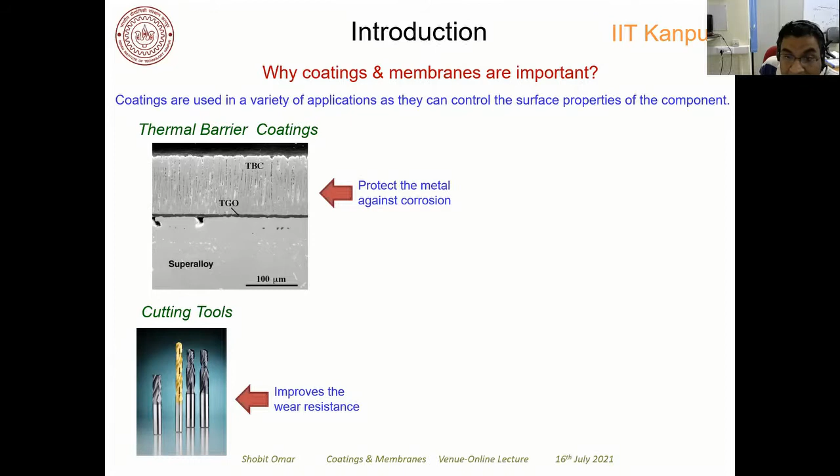Coatings are widely used in semiconductor industries, and for example, people use them for depositing silicon as well as for depositing insulating material like silicon nitride. Okay, I guess everybody is aware that insulating materials are as important as the electrically conducting materials, because they form the barrier between the two electrically conducting materials, right? So silicon nitride coatings are very important in these circuits.

And of course, solar panels are made of coatings of amorphous silicon, or nowadays people use these perovskites, organic perovskites. So these types of solar panels are also made of coatings, right? Thin film coatings. So people use sophisticated techniques to make these solar panels.

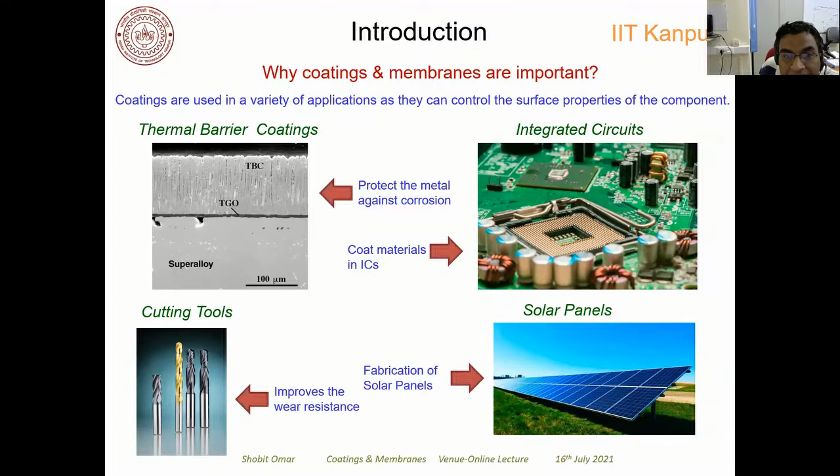These coatings are also used to improve the hydrophobic nature, right? So some coatings are done on the material so that the hydrophobicity increases, and sometimes you want to decrease the hydrophobicity. You want it to be hydrophilic. So in that case also the coatings are used.

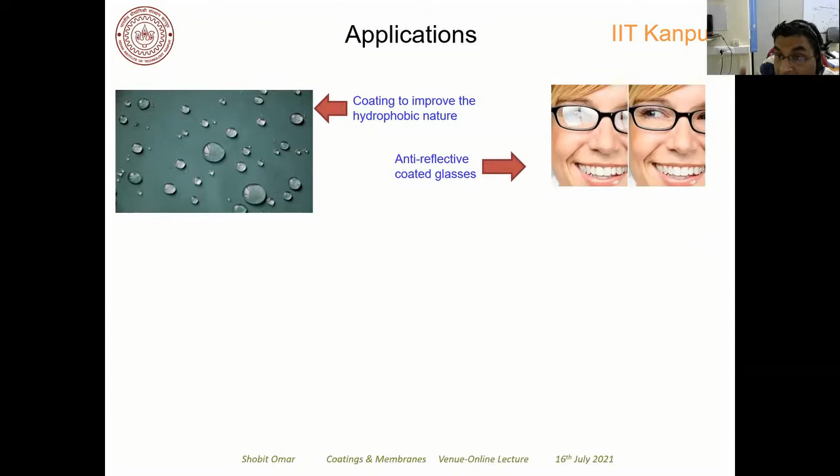These anti-reflective coatings are used on glasses, right? To make the vision more clear. And sometimes people use antibacterial coatings to protect the surface. Okay, these coatings are very important nowadays with COVID-19 type viruses out there. So people try to coat the sample or component with antibacterial coating.

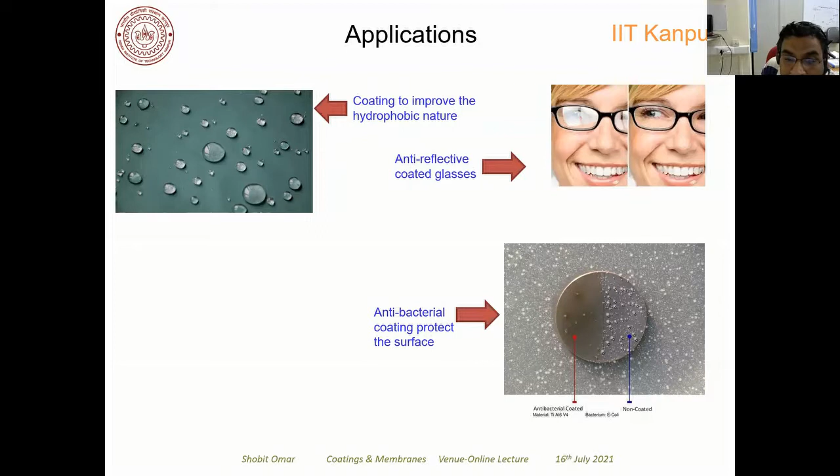And they are also used in other devices such as batteries, and I will talk about it. But you can see that the current collectors here are coated by the electrodes, right? So electrode coatings are there, and there is an interlayer which separates these two electronically conducting electrodes, right? So the separator, which is an interlayer that does not conduct any electrons, separates both these electrodes. So coatings and membranes are very important in this application as well. And more about this when I talk about the case studies.

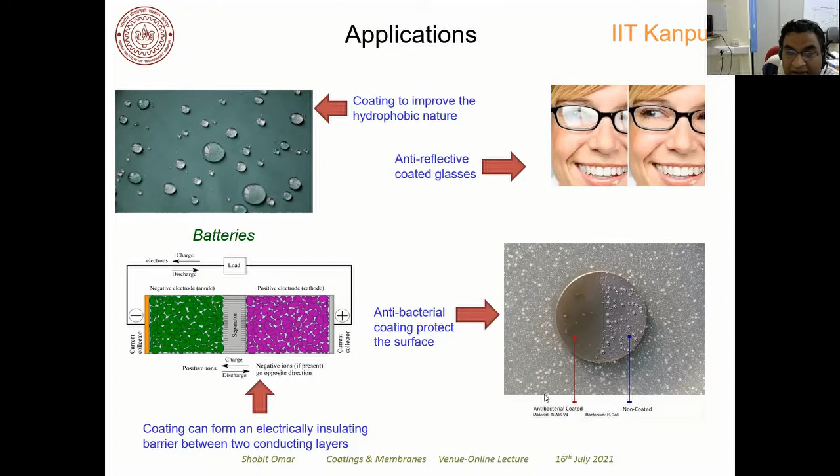So let us talk about the different deposition techniques people use to deposit the coatings. Now, before going into that, I want to say that there are a lot of things which are very important when you select what type of deposition technique you have to use to coat the samples or the component. First and foremost is the cost. What is the cost requirement, and what is the thickness that you want to make of that coating? And the other thing is whether your component material can withstand the condition in which the coating is made. What is the sample size, right? All these things are very important while selecting what type of technique to use for a particular application.

So let us talk about the deposition techniques. Well, there are different types of deposition techniques people have used, and here I have listed a few of them. The first one is if you deposit a vapor on a substrate, and those types of techniques are physical vapor deposition and chemical vapor deposition. I will talk about them later on. But here the vapor is getting deposited on the surface of the substrate. Then what you have is a wafer, which is a substrate placed inside the chamber, and the constituents of the film are delivered in the gas phase, right? As I said, it's a vapor deposition, and they form a thin film on the substrate.

Then you have liquid phase deposition techniques, where liquid is getting deposited on the substrate. And we have a few of them, like spin coating, spray coating, blade coating, dip coating, and of course tape casting, which is a kind of blade coating.

So we will talk about it, but more or less the principle is that you form a uniform slurry or solvent, and you coat it on the surface of the substrate to form a thick film. Normally, the vapor deposition techniques are used to make thin films, while the liquid phase deposition techniques are used to make a thick film. Okay.

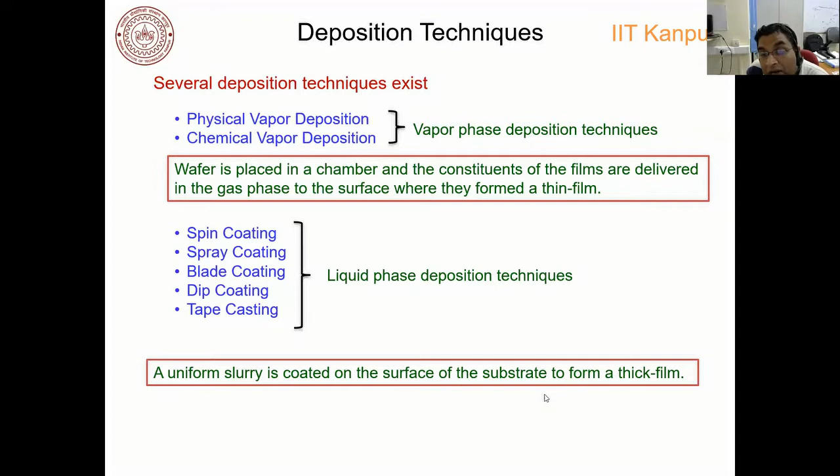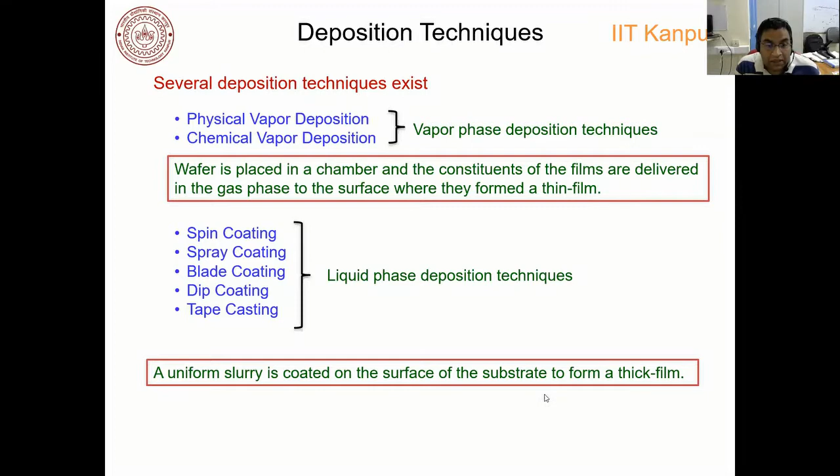Of course, there are vapor deposition techniques where you can make thick film as well, but then the quality of the film as well as how much time and money is involved to make that film is also a part of the consideration that you have to make while selecting the vapor deposition technique to make a thick film. So let us talk about the first vapor deposition techniques.

Okay, so what are the requirements to make a thin film deposition? Well, the composition of the film should be the same as what we have desired, right? Because this is a vapor deposition, the composition of the thin film should be very much what we have desired. It should not be different, okay? And there should be low contamination. I will talk about that. We normally use a target material to coat the substrate, so the contamination may come from there. So we have to make sure that there is low contamination inside the thin film that is deposited on the substrate.

For semiconductor industries, electrical properties are very much important. So if you are putting a dielectric material, then you should not have any electrical conductivity inside the thin film. And if you are putting electrically conducting material, then the electrical conductivity of the thin film should be preserved. So that's one of the important aspects that you have to take care of when selecting a certain type of vapor deposition technique, right?

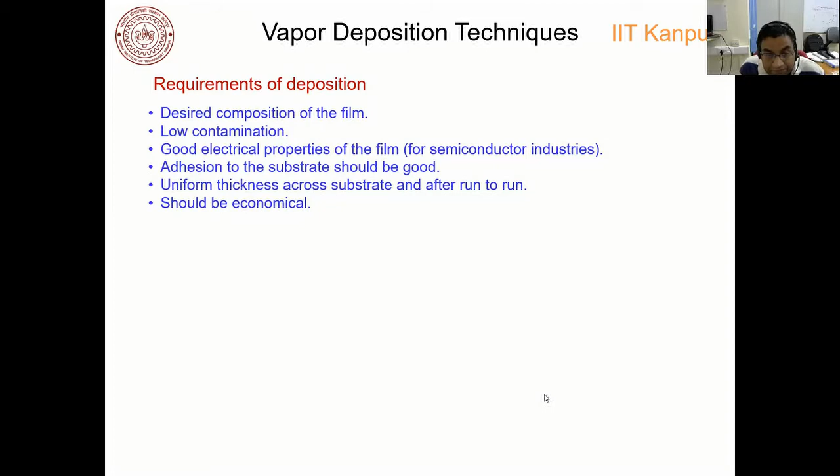And when you talk about the differences between chemical vapor deposition and physical vapor deposition, as I said, vapor deposition is of two types, chemical vapor deposition and physical vapor deposition. You will see that in CVD, the film would occur at high temperature, leading to a formation of corrosive gaseous products, which may leave impurities in the thin film that you are depositing, right? So you have to make sure that these products that are formed are pumped out of the chamber efficiently. Otherwise, they will form contamination.

In a physical vapor deposition, the film deposition takes place at relatively low temperature, but there are some variants as well where you require high temperature. But normally, this type of technique occurs at low temperature, and you do not form any type of corrosive products. Okay, so this is one of the advantages of PVD compared to chemical vapor deposition. In PVD, you do not form any type of products, and in CVD, you form gaseous products you have to flush out from the chamber.

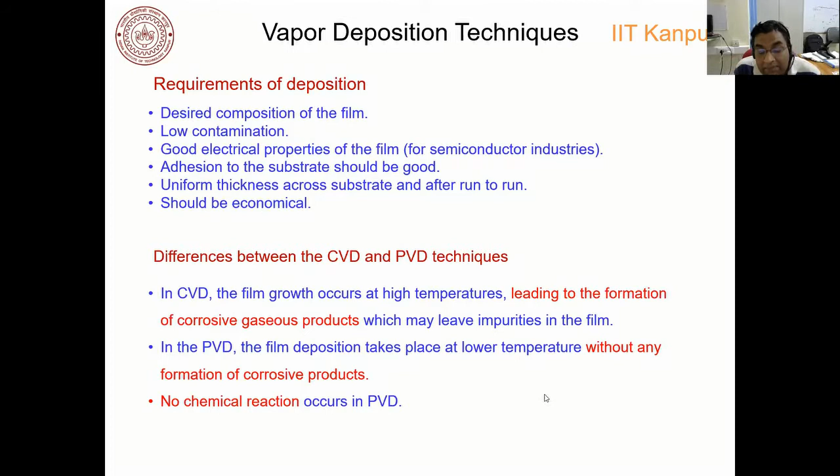Now, this is one of the advantages, but one of the distinct features of CVD is it has some chemical reaction involved, right? And in PVD, there is no chemical reaction involved. So this is a difference between a CVD and PVD process. So let's talk about the PVD first, okay? PVD is the acronym of physical vapor deposition.

It's a vaporization coating technique that uses physical means to transform the solid material to vapors, which will coat the substrate. So I just want to correct here. It is not just a solid material. It can be a liquid as well. But the important thing is that it is using a physical means to transform that solid or liquid material to vapors, and those vapors are going to get deposited on the substrate.

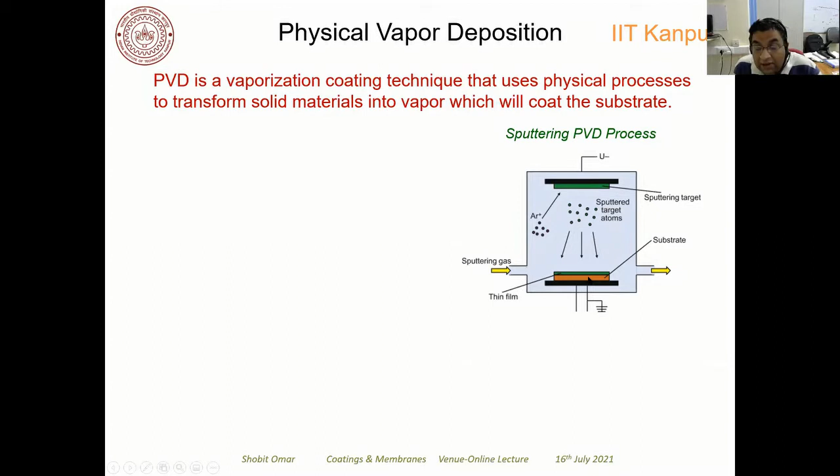This figure shows the sputtering PVD process. You can see that on the top you have a target, and the sputtering gas is fed into this chamber, which has a high vacuum, and this sputtering gas sputters the target, and the atoms are ejected out from this target, and these atoms in the gaseous or vapor form get deposited on the substrate. Okay, so this is normally the principle of physical vapor deposition.

So here I just showed you the sputtering PVD process, which I will discuss later on also. But an important aspect of PVD is that you can use a solid or liquid source to create thin films, right?

To create vapors. So this solid, here I have shown the solid phase, right? But you can also use liquid phase. Okay, that is also physical vapor deposition. And it uses a physical process such as high temperature, vacuum, or gaseous plasma to force the material to be deposited into vapor form.

So it transforms the solid or liquid into vapors using a physical process, and that physical process can be high temperature, vacuum, or gaseous plasma. So atoms in the gaseous form travel from the source to the substrate under partial vacuum. The vapor undergoes condensation on the substrate to form a thin film, right? And you can see there is no chemical reaction occurring in this process of physical vapor deposition.

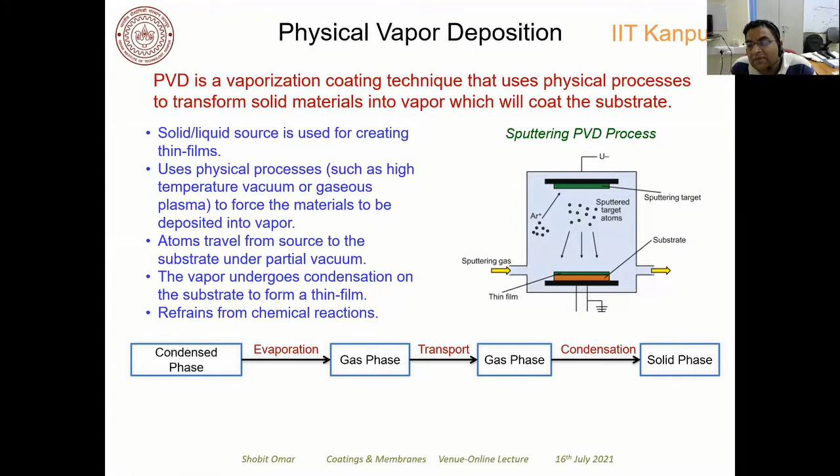So if I summarize, I can say that the condensed phase, which is solid and liquid, is first evaporated to the vapor phase, and then that vapor phase is transported from the target to the substrate, and then it condenses to form a thin film solid phase on the substrate.

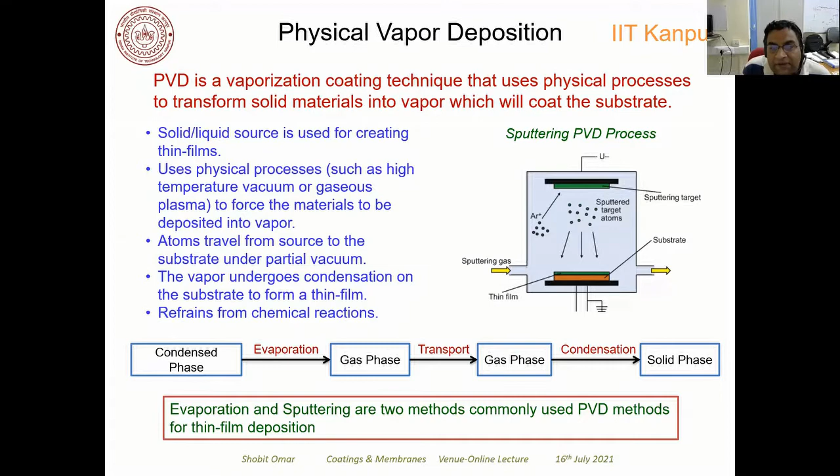Evaporation and sputtering are two commonly used methods in PVD for depositing thin films, right? So I can classify physical vapor deposition into two ways. One is evaporation, the other one is sputtering. So let's talk about evaporation. These are the evaporation system requirements. You require very high vacuum, around 10⁻⁴ to 10⁻⁷ Pascal, for better quality films.

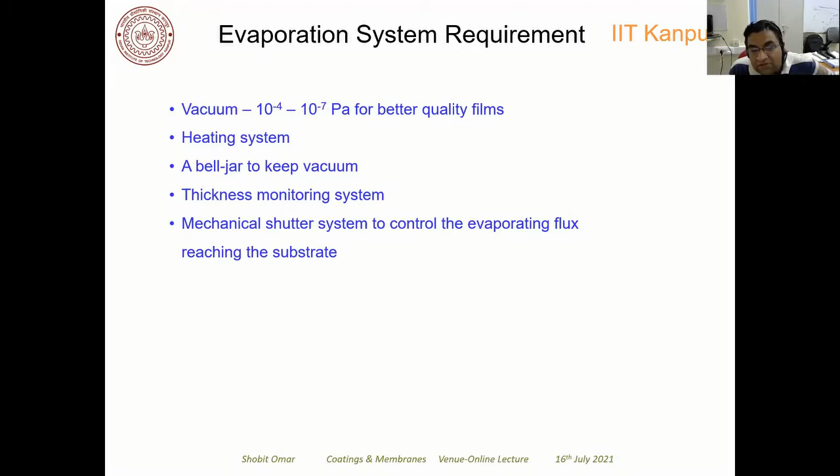You require a heating system. The heating can be thermal heating, or it can be heated by plasma. You require a bell jar to keep the vacuum inside the chamber. You require a thickness monitoring system, as well as a mechanical shutter system to control the evaporating flux reaching the substrate. So you have to control that evaporating flux coming from the target to the substrate, so you require a mechanical shutter system as well.

So let's talk about the thermal evaporation deposition technique. As I said, there are two types of PVD. One is evaporation, the other is sputtering. Here I am talking about evaporation, and in evaporation you have the thermal evaporation deposition technique. As the name suggests, thermal evaporation deposition uses external heating to heat the target material, and that target material is converted into the vapor phase, and that vapor is deposited on the substrate.

The important thing about this vacuum is that if you have high vacuum, then the atoms can go in vapor form directly from the target material to the substrate without getting scattered in between. Also, normally the distance between the target material and substrate is quite far, compared to the electron beam evaporation deposition technique or the sputtering process.

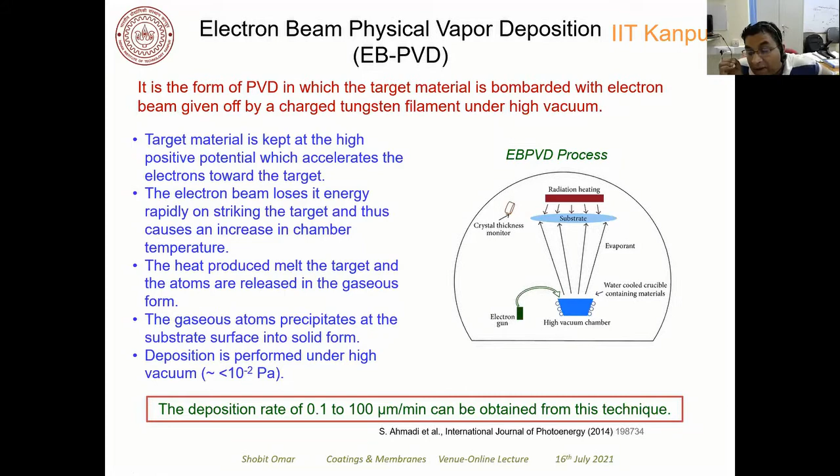The deposition rate is around 0.1 to 100 micron per minute, and that is what we can obtain from this technique. Now, the important advantage of E-beam physical vapor deposition is that you can go to very high temperatures, because you are locally heating your target material, so this technique can allow deposition of refractory metals such as tungsten, tantalum, right? So this is one of the main advantages of using electron beam physical vapor deposition.

The other thing is that since you are locally heating the target, you can use different types of target inside the same vacuum chamber. Okay, so you do not basically break the vacuum, right? You don't have to break the vacuum to change the target every time, right? So you can make multi-layer structures in the same chamber.

Okay, and of course the contamination is not much because you are not heating the crucible, you are heating just the material, and you are locally heating the material. So low degree of contamination from the crucible in the thin film that is deposited on the substrate. Okay, so these are the main advantages of using electron beam PVD technique.

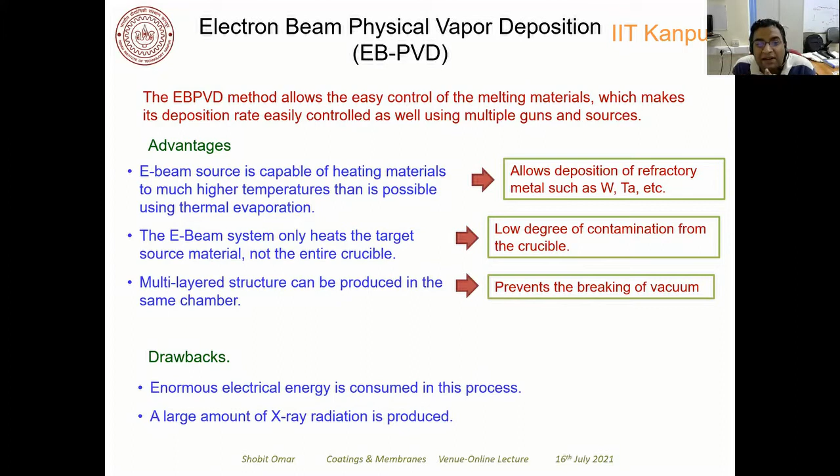What is the disadvantage? Disadvantage is that you are consuming a lot of electrical energy to melt the surface of the target materials, right? And when the electron beam interacts with the solid material, it can also produce X-rays. So X-rays are produced inside the chamber. So these are a few drawbacks of electron beam physical vapor deposition.

Any questions till now? If you have any questions, please ask me right now. Okay.

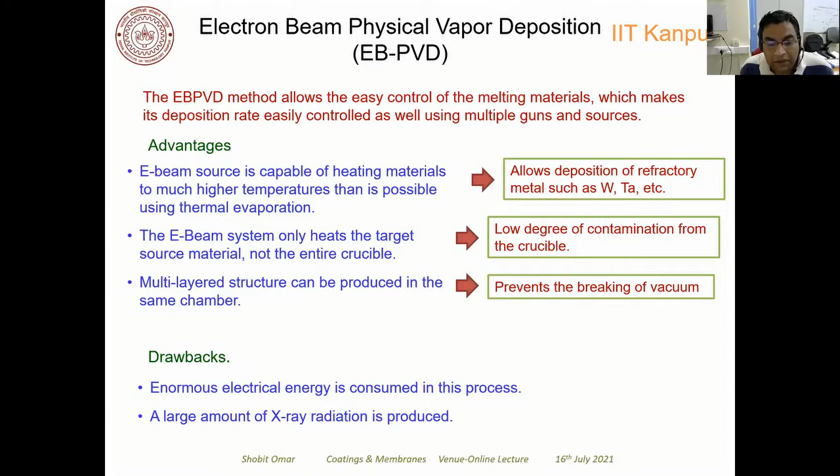So let's talk about the modeling of the evaporation vapor pressure, right? So first of all, I talk about this P star, which is the partial pressure of a gas in equilibrium with a condensed phase at a given temperature. Okay. So we know that for any type of material, we have a vapor pressure. And that vapor pressure is basically the pressure that is applied by the vapor phase on the condensed phase of that material at equilibrium, right? So at that point, there is no transfer of material from the condensed phase to the vapor phase and vice versa, right? So that pressure is called the vapor pressure, which is given by P star.

Okay. Now this P star, we say that the higher the vapor pressure of the material is, the more volatile it is. Okay. The more the vapor pressure, the more tendency this material has to get evaporated and to form the vapor phase, right? So now P star is only a function of temperature, and I will give you the relationship between P star and T. It is governed by the Clausius-Clapeyron relationship, and it is given by this.

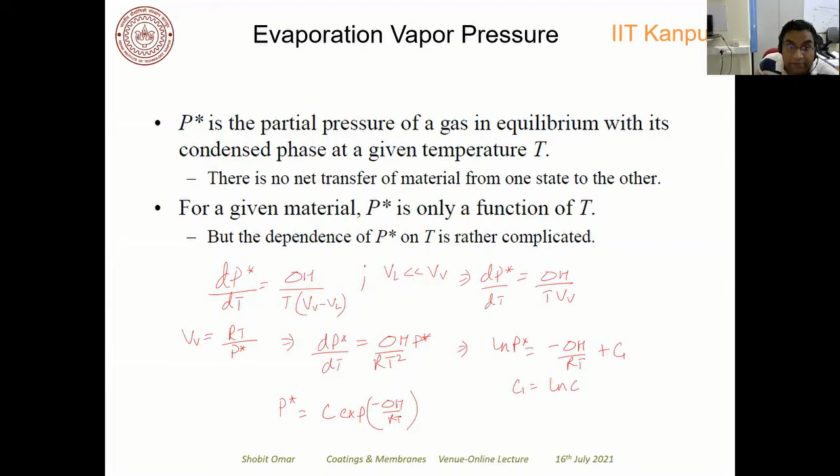Okay. So again, I repeat here that the higher the vapor pressure, the more volatile the material. So the evaporation is more when you have higher vapor pressure. So ΔH is constant in this equation? Yes, it's a latent heat. Okay, sir. Okay, so what I have shown you here in the previous slide is P*.

And let's say there is a hydrostatic pressure which is applied on the condensed phase, right? On the condensed phase from the evaporant. And that pressure is given by P. Okay. So, Heinrich Hertz found experimentally that the evaporation rate is proportional to P* minus P.

Okay, so if you have a solid material and evaporation is occurring, the evaporation rate is proportional to this P* minus P, and that is also consistent with the kinetic theory, in which the impingement rates are proportional to pressure. Right? Impingement is how much collision is occurring on the surface. Right? So that flux is proportional to the pressure.

And the important thing is that Hertz also found that the evaporation rate could not be increased by supplying more heat. It cannot be increased unless you are changing the temperature and changing the P* value. Okay, P*. As I said, from the Clausius-Clapeyron relationship, P* is only dependent on temperature. Even if you are giving a high amount of heat and it's not changing the temperature, then evaporation will not change.

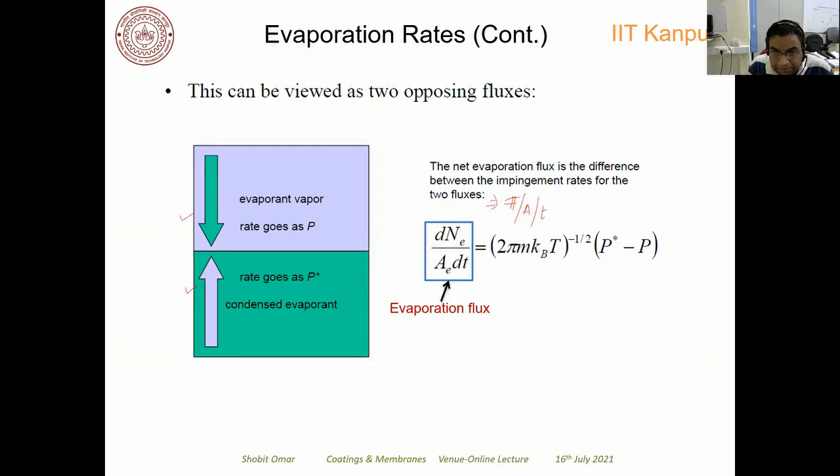Now, Hertz measured the evaporation rate, and he found that in mercury vapors, the value that he was getting from the evaporation is basically 1/10 of what you obtain from this relationship. Okay, so something is amiss. There is something which he is not considering, right?

So Knudsen postulated that the evaporated vapor molecules impinging on the condensed phase surface may be getting reflected back. Okay, so whatever atoms are going from the condensed phase to the vapor phase, they may be getting reflected back to the vapor phase, and maybe we are overestimating the evaporation rate from this expression, right?

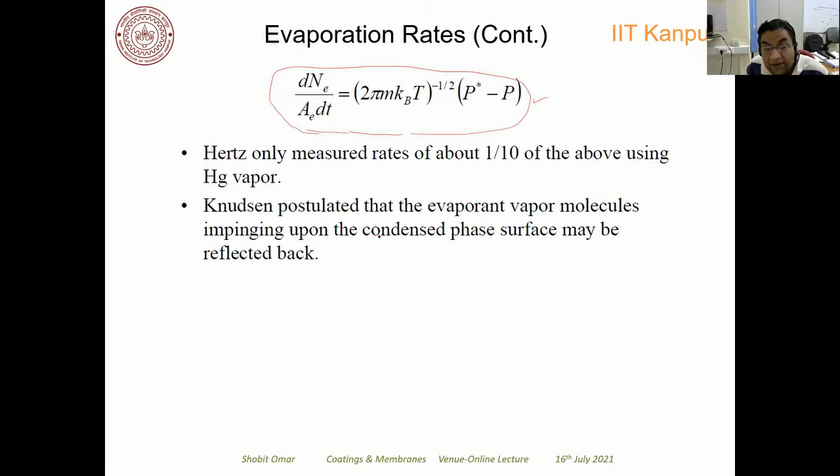So what he came up with is this relationship, which is called the Hertz-Knudsen relationship, and he used a constant coefficient called the sticking coefficient, which takes care of this return flux which is getting reflected from the condensed phase surface.

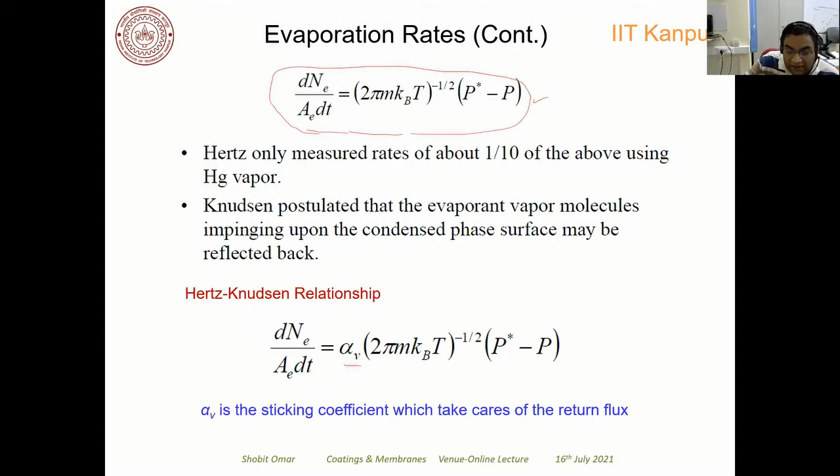Now, Knudsen also came up with a type of chamber geometry where the sticking coefficient is almost equal to 1. That means there is no return flux coming out. So we will talk about it here. I just want to write the evaporation flux here, dNE/dt, and it is given by equal to (2 pi m kB T) to the power minus half, where kB is the Boltzmann constant, T is the temperature, and m is the molecular weight, or atomic weight, you can say. Then you have P star, because P is going to be 0 when you have a

vacuum. And in Knudsen's cell, as I was saying, Knudsen had designed a cell where the sticking coefficient is almost equal to 1. So in that particular case, the sticking coefficient is going to be equal to 1. So what you have is dNE/(AE dt) equal to (2 pi m kB T) to the minus half, times P star. So this is what you will have.

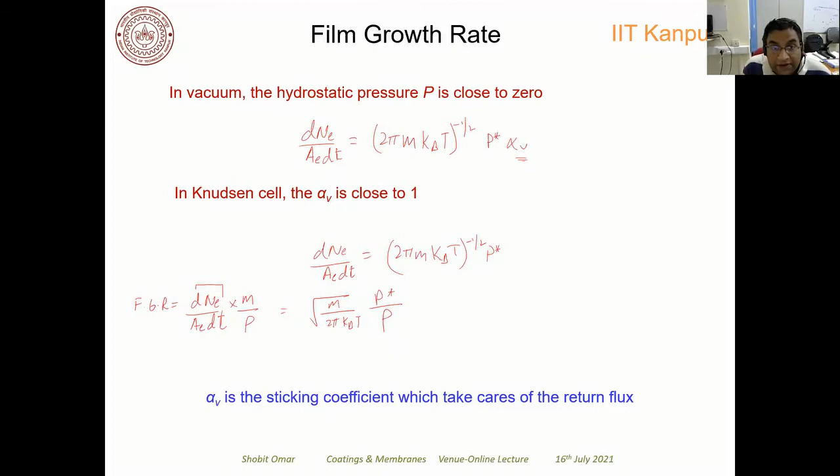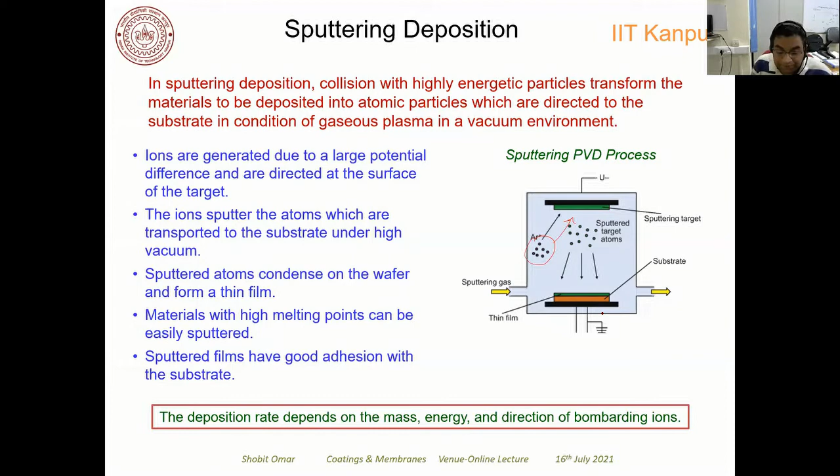Once the electrons are in the cylindrical path, they collide more with the argon atoms, and this results in more ionization of argon to form highly energetic argon ions. These argon ions are positive in nature. They strike the target material, which is negative, basically cathodic. So these argon ions strike the cathodic material, and the atoms get ejected and then reach the substrate.

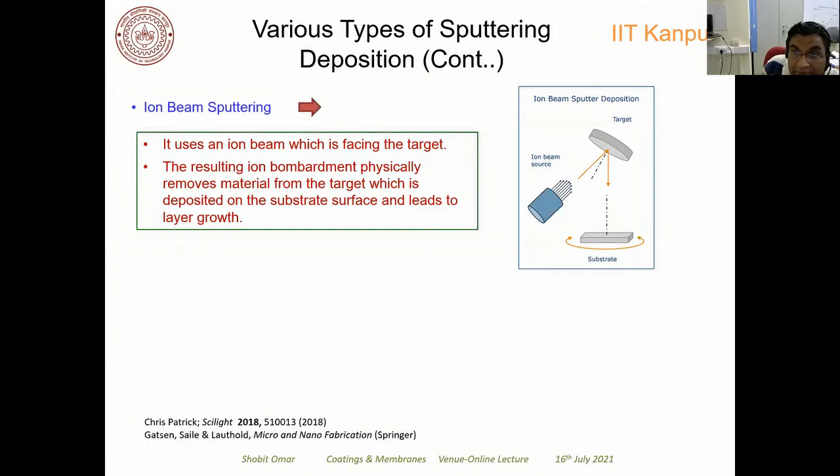Now, we also use the ion beam sputtering technique. In the previous case, we used the plasma, right? This sputtering technique uses an ion beam. Collimated ion beams are directed to the target surface at a particular angle, and then you have a substrate which is rotating, and the sputtered atoms in the vapor form get deposited on the substrate. So this is how the deposition occurs. In this particular case, we are using an ion beam as a physical process to deposit a thin film on the substrate.

Then there is also another variant which is quite extensively used to make a thin film of a dielectric material, the PLD technique, where you ablate the target material with highly energetic photons. They can have a high energy of 10 to the power of 8 watts per centimeter square. Once this laser beam strikes the surface of the target, the material absorbs the energy, and a plume of plasma is formed, and this plume condenses on the substrate, which is present at a certain angle. Also this substrate is heated, and that controls the nucleation rate of the thin film deposited on the substrate.

We also sometimes use oxygen and nitrogen, because when you use such a high temperature, the oxide may lose some oxygen, and that may create some defects inside the material. In order to keep the stoichiometry the same, we use oxygen as a background gas, and sometimes we also use nitrogen. But in all these techniques, there is no chemical reaction involved. Only physical means are used to sputter the target into the vapor phase, and that vapor phase is deposited on the substrate to form a thin film.

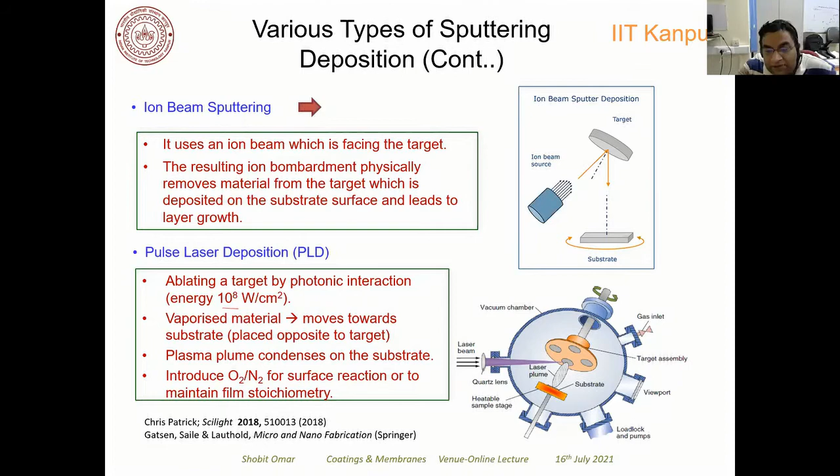Now let's talk about chemical vapor deposition, which is also a very important technique, quite extensively used especially in the semiconductor industries. As I said, it is used to deposit silicon, it is used to deposit silicon nitride, it is used for etching purposes, and it is also used for functionalization of the surface of the component. Now let me describe it here. What is basically the CVD process?

The chemical reaction is happening, and they form a thin film. Of course, if you have a chemical reaction, let's say you have a gaseous phase of A and B coming, they react to form C and D, right? So C forms a thin film, and you also have D, another gaseous product which has to go out from this chamber. So we have to pump this D phase out of the whole chamber. So this is the chemical vapor deposition technique, right?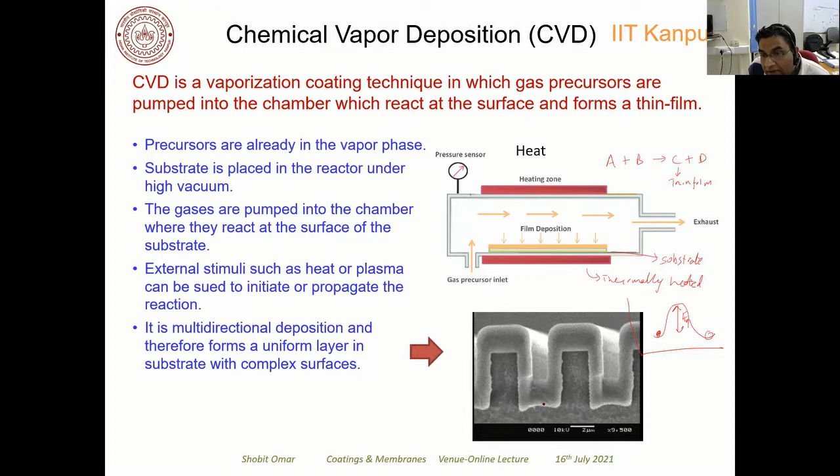Okay, so this is what I was talking about. Even if you have some type of grooves here, you will still have a uniform covering of the coating using the CVD process. Okay.

Of course, the gaseous products that are formed in this chamber have to be pumped out. Otherwise, that will lead to deposition, and that will contaminate the thin film that is formed on the substrate. So you have to have some means to take out this gaseous product from the chamber.

What are the different types of CVD processes which exist? There are many, but they share the same principle that I discussed in the previous slide, and I'd just like to state a few of them. One classification of CVD processes is based on the pressure inside the chamber. Some reactions occur at atmospheric pressure, so that is atmospheric pressure chemical vapor deposition. Some require low pressure, then you have low pressure chemical vapor deposition, and some require ultra high vacuum, then you have ultra high vacuum CVD.

Okay, and we also characterize CVD processes based on the stimuli that you apply. For example, here we use plasma enhanced chemical vapor deposition. So instead of using thermal heat, we use plasma to make the reaction occur. Now when you use plasma, you have to have some source of plasma inside the chamber. So that is plasma enhanced CVD. We have a source of plasma, and the substrate where the reaction occurs because of the heat provided by this plasma.

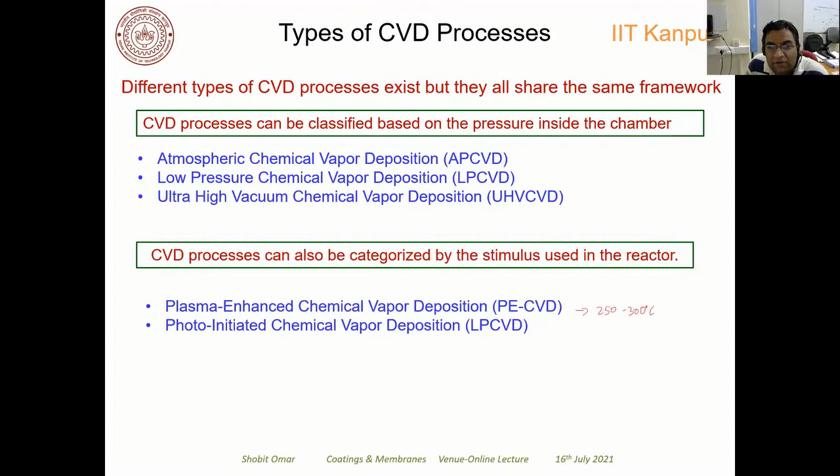Some CVD processes have a stimulus of photons, right? So the photons can initiate the process, and those types of CVD are called photo-initiated CVD. Sorry, there is a typo here. It's a photo-initiated CVD process. Okay.

Then we also have atomic layer deposition technique, which is a type of CVD process in which gaseous vapor is introduced one at a time in sequence. Okay, so you will get one layer of one phase, then you have another layer of another phase. So you can make a multi-layer structure using atomic layer deposition. Okay.

So these are the two important processes which I have talked about, which are based on the vacuum technology for the deposition of thick to thin film, and normally these processes are used to make a thin film, and thin film are basically the nanometer range.

If you have any question till now, you can ask me right now. Shall I proceed? If you have any question, you can ask me. Okay, so I will proceed. So, Mr. Omar, if you want a small break for a tea or something like that, please take it. It's not our idea to make you... No, that's fine.

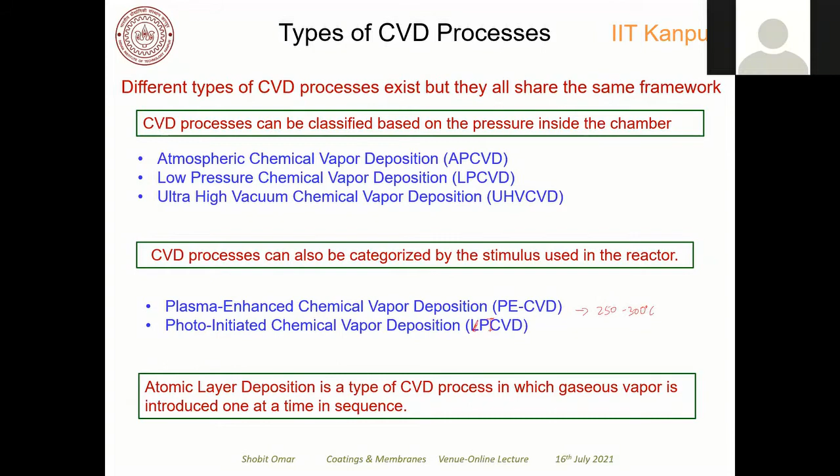I will continue. Okay, so another type of technique which is very important is thermal spraying technique. This technique is not a vapor deposition technique. In this technique you basically melt the powder that you have, and that melting will be done either through plasma, or by supplying thermal heat through combustion flame. Okay, and this liquid powder or melt is then deposited on the substrate, right? And you will have a uniform microstructure.

And I will talk about this plasma spraying when we talk about the thermal barrier coatings, right? So there are various variants of thermal spraying coating, and one of them is electric discharge spraying, and the other is oxy-fuel coating spraying. You cannot make very thin coatings using thermal spraying technique. You can go from 20 micron to several millimeter. Okay, and the melt that is deposited on this substrate is basically called splat, and they have a certain microstructure, which I will talk about later on.

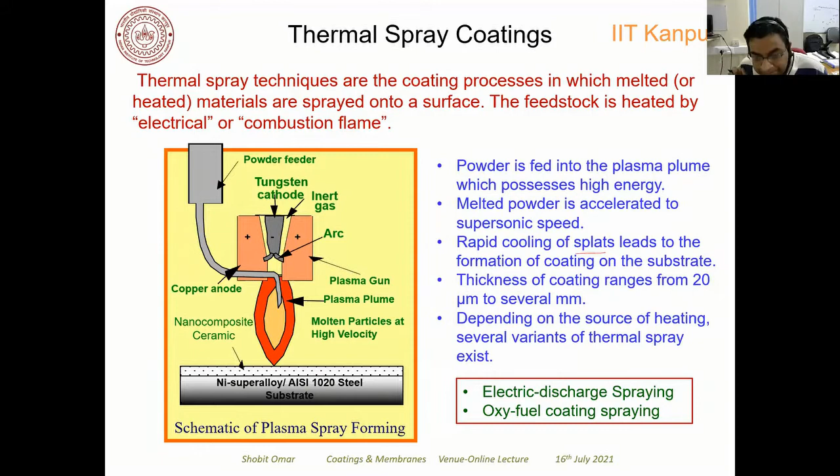Now let us talk about liquid phase deposition, which is also very important when we try to coat ceramic or any type of polymer, right? And this type of technique is also extensively used in semiconductor industries. It is also used in consumer electronic markets, where you have cell phones which are made, and you want to have a polymer deposition on a metal substrate, then you use these type of coatings where the liquid phase is deposited on the hard ceramic substrate or a metal substrate. So basically the material is deposited in the liquid form.

Okay, so high molecular weight polymer is dissolved in organic solvent, and you will get a uniform adherent defect-free polymeric film using these techniques. And you will evaporate the solvent, and the solid film that will remain will form a uniform coating on the substrate. So there are various types of techniques present, and a few of them are listed here. One is spin coating, spray coating, blade coating, tape casting, and dip coating techniques.

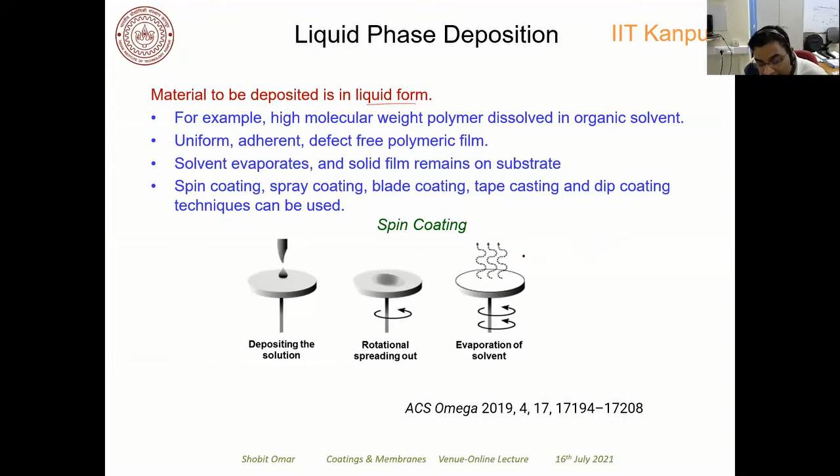Okay, so let's just talk about the spin coating technique, and you can see that you require a vacuum chuck which can hold your substrate here, and you first clean the substrate so that there should not be any contaminant. You remove all the particles from the surface of the substrate, and then you drop the liquid phase on the surface of the substrate, and then you spin this vacuum chuck. Because of the centrifugal force, this liquid will get deposited uniformly on the surface of the substrate, and the thinning of liquid film will occur.

Once it is done, if you dry it, the solidification will occur from the center, and then it slowly moves in a radial direction, and finally you will get a solid film once you dry it. So this is how this process occurs, and the major issue with this is that you can only do it on a flat surface, and the maximum thickness that you will get is around 200 microns. So if you have surfaces where you have some type of side walls, you cannot use this technique. That's a drawback of spin coating techniques.

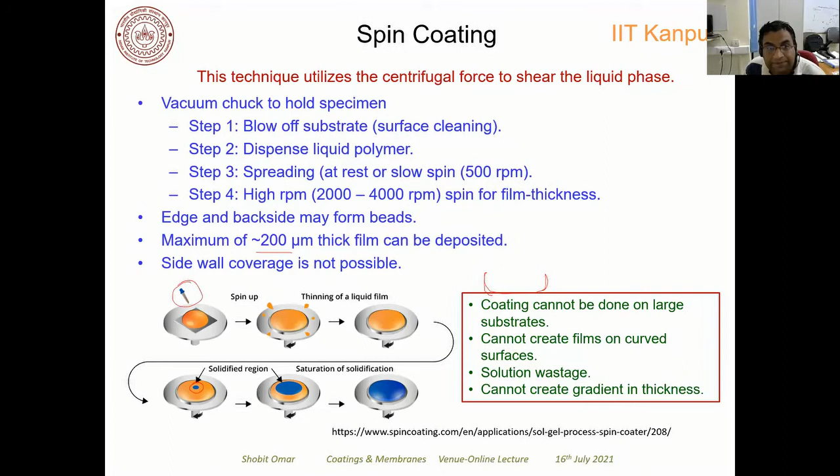So film thickness depends upon the rotational velocity, because rotational velocity will dictate what is the centrifugal force that you will apply. So higher the velocity, smaller the thickness, right? So this is the relationship that we have, where K and alpha are the two constants, right?

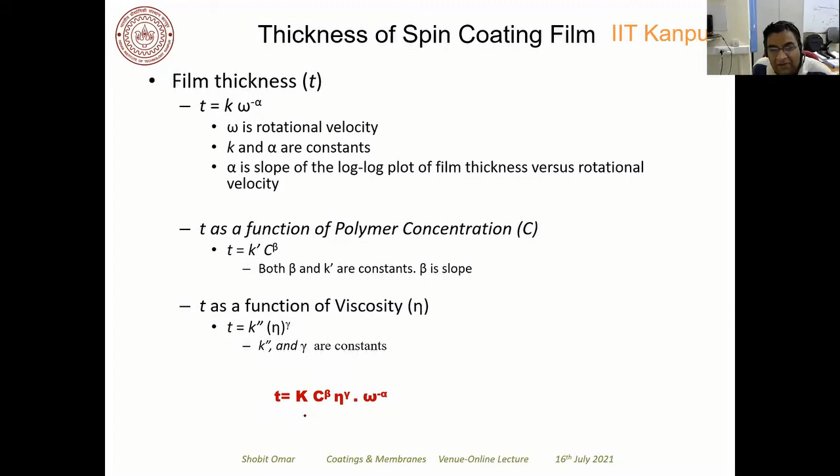And then thickness also depends upon the polymer concentration. If you have a higher concentration, then you will see that the polymer is more viscous. The thickness is directly dependent on the polymer concentration. Also, thickness will depend upon the viscosity, and you can see eta is the dynamic viscosity here, and there are a few constants. So if you sum these three relationships, then you will get the expression for the thickness of the coating. Here, K, beta, gamma, and alpha are four constants.

Yes, I know. Dear participants, I think we have lost the speaker. Is he still there? Shobit Omar. Dr. Shobit, oh, yes, please. Yes, we have you back now. We lost you about maybe a minute ago. Your screen is not there. My screen is not there? Okay, let me share this again. Is it there now? Yes, we can see that. The same slide you were talking about.

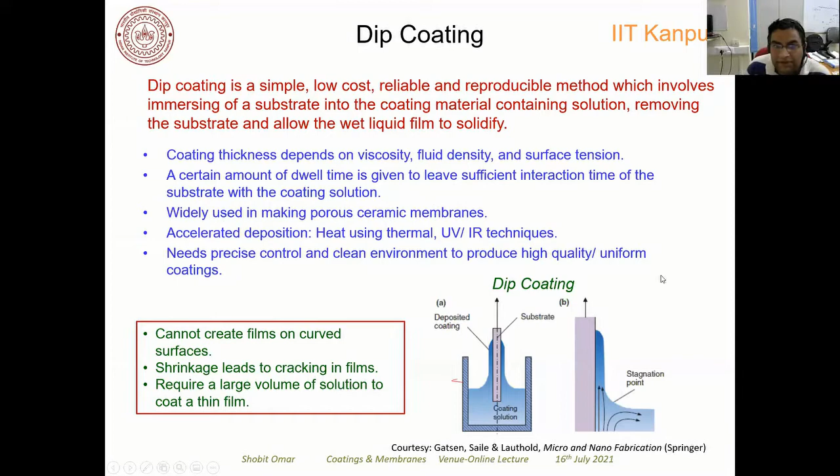Okay. So let's go to another liquid phase coating technique. It's blade coating, and in this technique you have a liquid phase and you run the blade over the substrate. There is a gap between the blade and the substrate, and through this gap, the thickness of the liquid coating is decided.

If you want a thicker coating, then you keep this gap higher. So the small gap between the blade and substrate determines how much solution can get through.

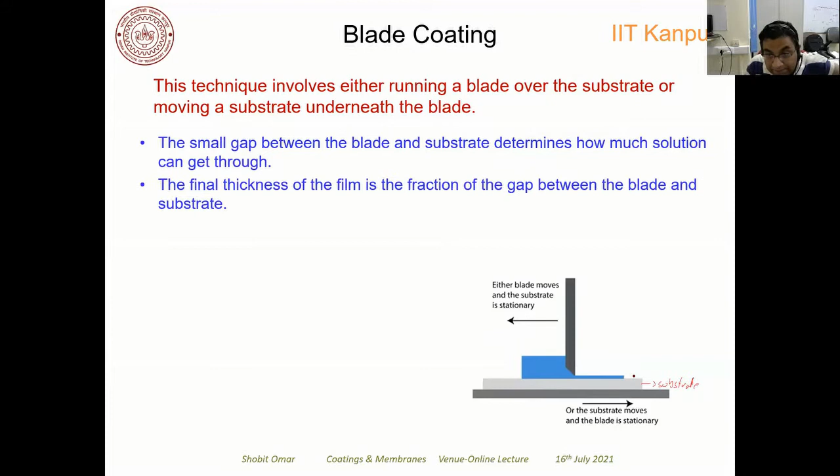Okay, so this blade is run through the substrate, and the final thickness is basically the fraction of the gap between the blade and substrate. And the final thickness also depends on the viscoelastic property of the solution and the speed of the blade while it is running over the substrate. Okay.

This process is scalable, but it cannot be used for a curved surface, and it is an inexpensive process. You can set it up in your laboratory, and you can make a uniform thin film on the substrate. Okay, but you cannot make it on a complex component with a complex structure. Also, you cannot make very thin films from this process. You cannot make a film with a thickness of less than 10 micron using this process.

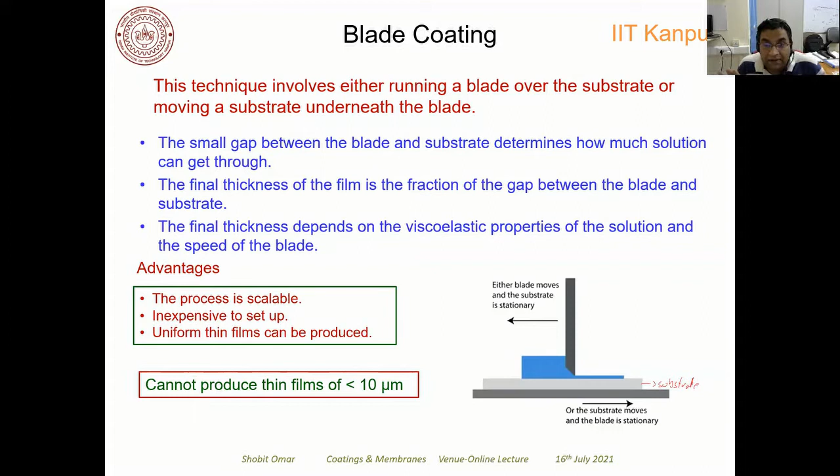Now we have the electrochemical deposition technique, and here I have shown you certain silver coatings on plates which are placed inside this liquid electrolyte. The deposition occurs through electrochemical means, and that process is called electrolysis. According to Faraday's law, given in 1833, the amount of chemical change produced by an electric current depends on the quantity of electricity that is passed.

So you have an electrochemical cell with a cathode and an anode. The deposition normally occurs at the cathode, where ions from the anode pass through the electrolyte, get reduced, and get deposited on the cathode to form a thin film. The amount of energy that you give dictates the amount of electrochemical reaction that will occur.

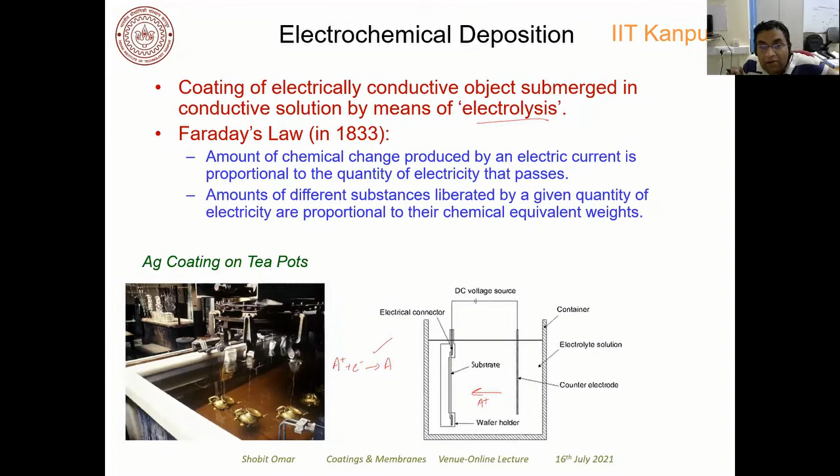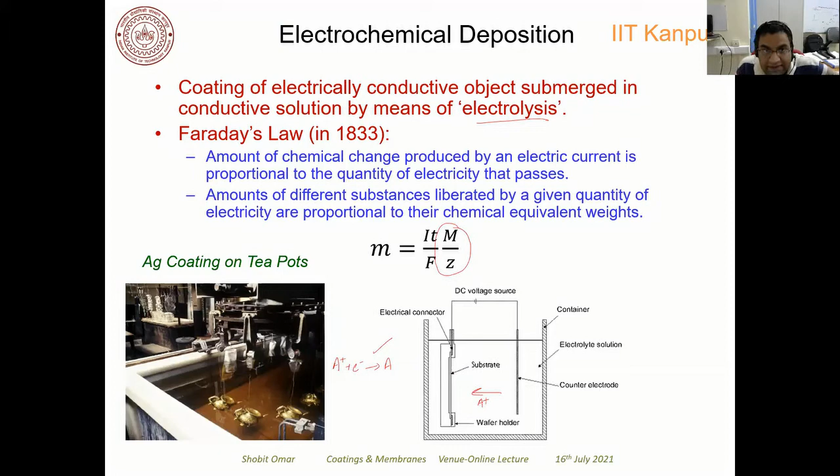So the amounts of different substances liberated by a given quantity of electricity are proportional to their chemical equivalent weights. The weight of the material deposited depends on the chemical equivalent weight, and this is given by this relationship: the mass of material deposited on the substrate depends upon its chemical equivalent weight. So this is the basics of electrochemical deposition, and I have a few more slides on the electrochemical

potential as well as the delta G. There is a reduction occurring at the cathode given by this reaction. If delta G is the Gibbs energy change of this electrochemical reaction, it is related to the electrode potential: delta G is given by minus nFE. Now this E depends on the activity of A and the activity of these ions, so the concentration and temperature dictate the electrode potential.

Now, when we do electrolysis, you have to give this much potential for the reaction to occur. That is what the electrolysis process is: you give electrical energy and change it into chemical energy. The electrical energy required is dictated by the Nernst equation, which gives you the potential on the cathode side.

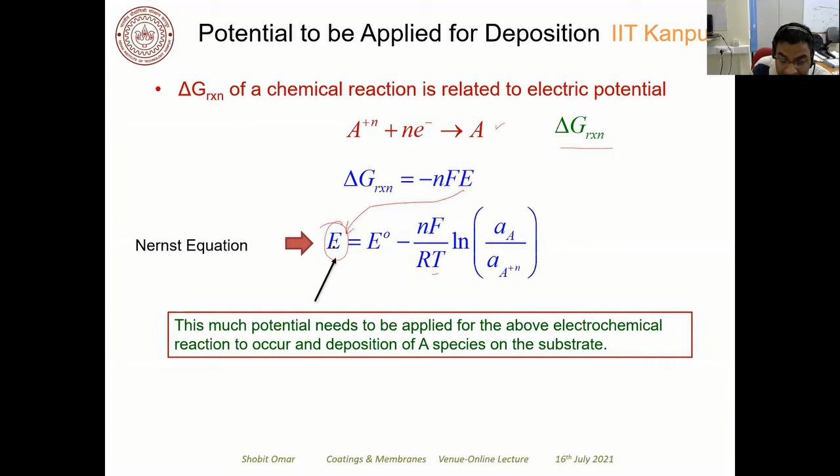So if you have gold ion as well as lead ion present in the electrolyte, then the gold ions are going to get reduced on the cathode and not the lead ions, because they have more tendency to get reduced, because they have a higher electrode potential.

So if you are electrochemically depositing an alloy, you have to satisfy two conditions. One of the metals should get deposited on the substrate; that is the main requirement for the alloy. One of the metals should get electrochemically deposited on the cathode side. The other thing is that the potential of the other element of the alloy should be very close to that of the remaining metal ion. So both metal ions should have a very close deposition potential. Those are the two conditions.

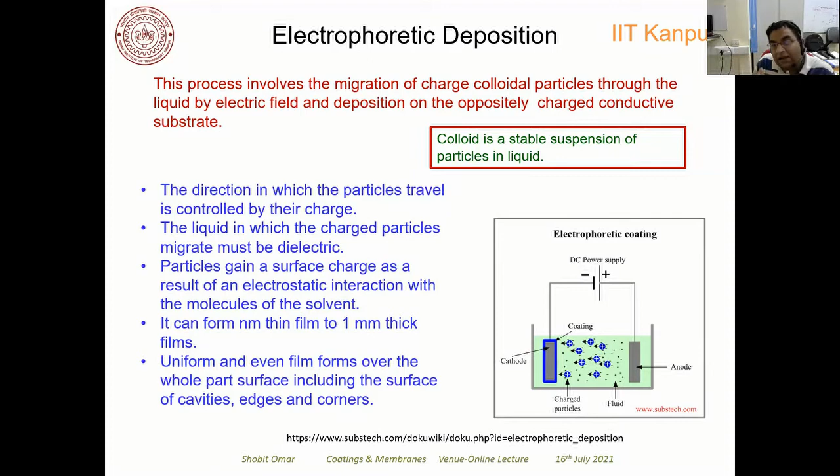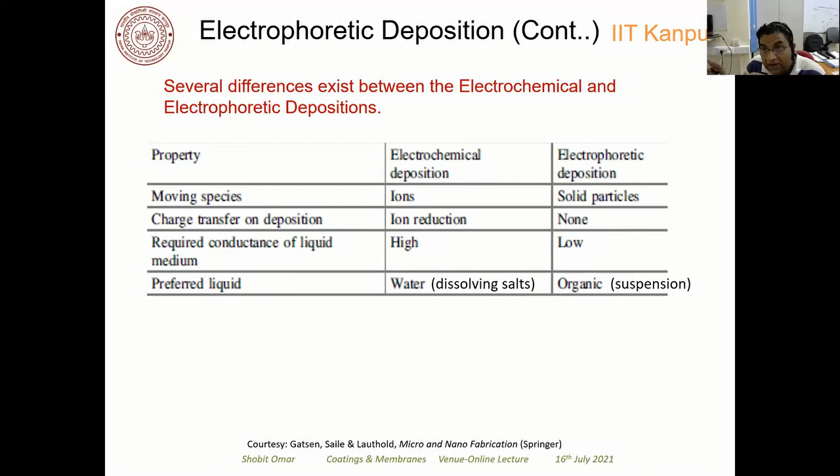You require a dielectric liquid. Normally in electrochemical deposition we use water which has some salts inside. But in electrophoretic deposition we do not want any water. The fluid should not have any water. The reason is that if you have water, hydrogen and oxygen gas will evolve on the cathode and anode side, and that will create porosity in the film. So we do not want any water present in the liquid medium.

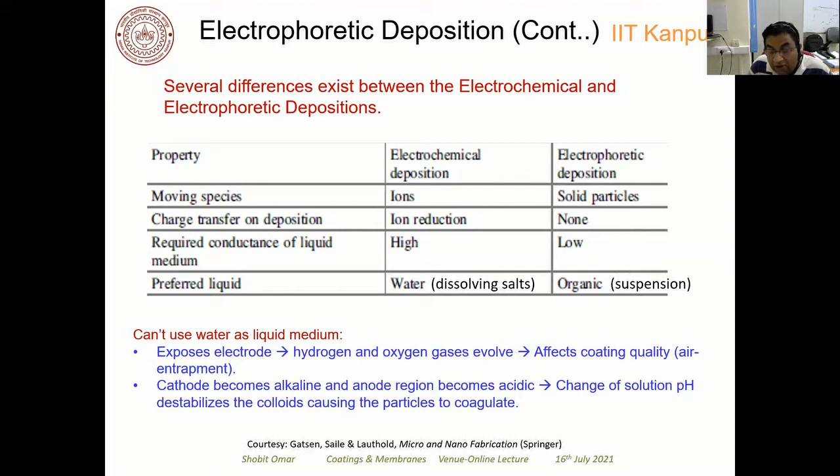Also, if water is present, you will see that on the cathode side you have more OH- ions, while on the anode side you have an acidic region, and that will change the pH of the solution and destabilize the colloid present inside the fluid. So you do not want water present in the liquid medium.

So lastly, I talk about the tape casting technique, which is based on blade coating. You can see here the tape which is formed, and this is the blade which we call a doctor blade. You pour your slurry here, and the substrate you have is Mylar.

Okay, so in tape casting you can make standalone membranes, and also you can make coatings on a particular substrate, right? So both are possible using the tape casting technique. So what happens is that this mylar rotates, right? It rotates, and it is normally a plastic material, and the coating is done on the mylar. So you pour your liquid on this, and this liquid passes through the gap between the doctor blade and the mylar, and you will have a uniform coating on top of the mylar.

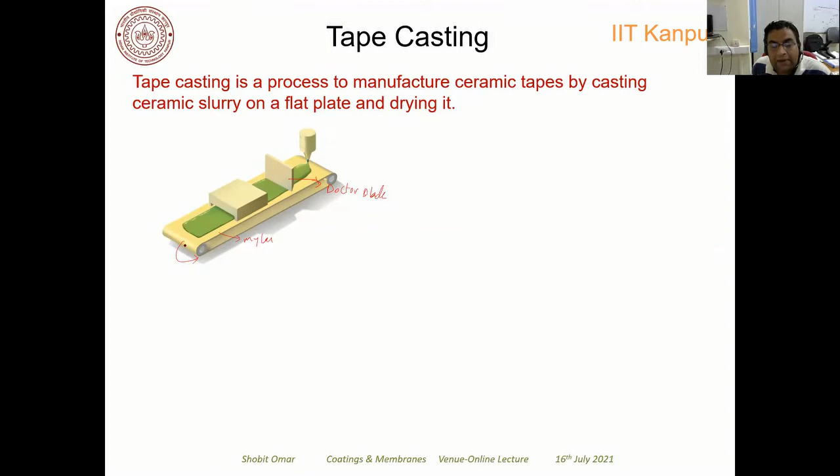Okay, and this is the dryer which is present to dry the coating. So you can get a flexible ceramic tape out of the tape casting technique, right? So you see how flexible these ceramic tapes are, and this flexibility you get from adding the plasticizer inside the slurry. We normally know that ceramics are brittle in nature, right? They are very brittle, but you can provide the flexibility by adding a plasticizer and other additives.

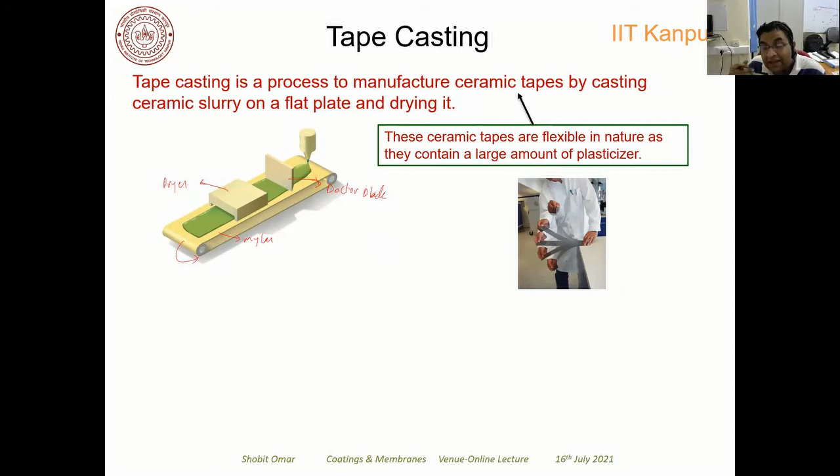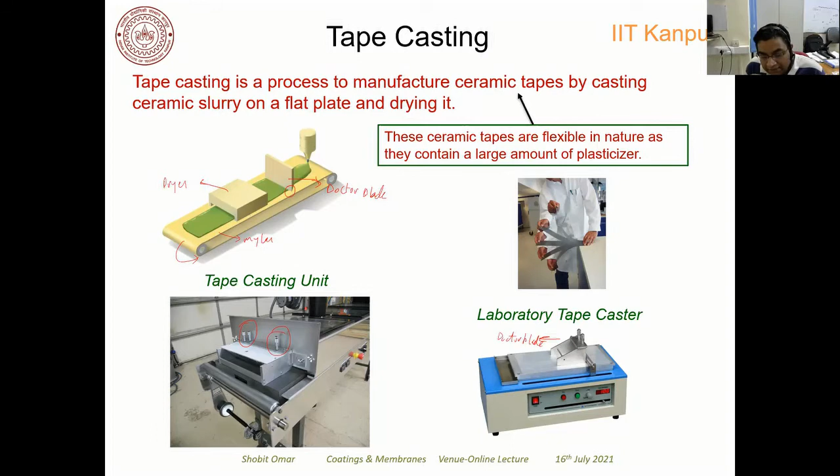So this is the tape casting unit, and you can see this is the doctor blade, and there are screw gauges present, which control the thickness between the mylar and the doctor blade. So these are the screw gauges, and of course this is a dryer which is also there. In some cases, instead of the mylar, your doctor blade moves, right? This is a doctor blade which moves instead of the mylar. So you can get the coating on the substrate. So this is another variant, which is a laboratory tape casting.

So this is one of the recipes of a ceramic slurry. What we are trying to do is make a tape of a composite material based on nickel oxide and GDC, and you can see that if you have to make such a tape, you require a large batch of material. Normally we use a 150 gram batch, right? And then you add some solvents which are volatile in nature. Toluene and ethanol we normally prefer, and then we also add some dispersant so that these particles are well dispersed

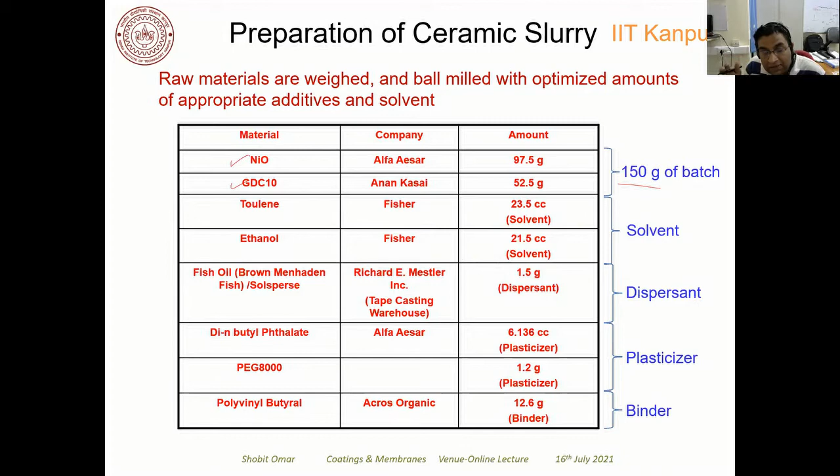inside the solvent. We add plasticizer, which is made of DBP and PEG. That plasticizer gives you the plasticity inside the tape, and PVB, which is called polyvinyl butyral, is the binder, so that will keep the tape intact, right? All these are polymers, and these are very important to give the plastic property to your tape.

Okay. So what is the process of making ceramic slurry? So the first step is de-airing of the slurry. First you ball mill your slurry, and then you take the slurry out, and that slurry may have some entrapped air, right? You do not want that entrapped air to be present when you pour the slurry inside the tape caster. So you have to de-air the slurry, and this is the experimental setup to de-air the slurry.

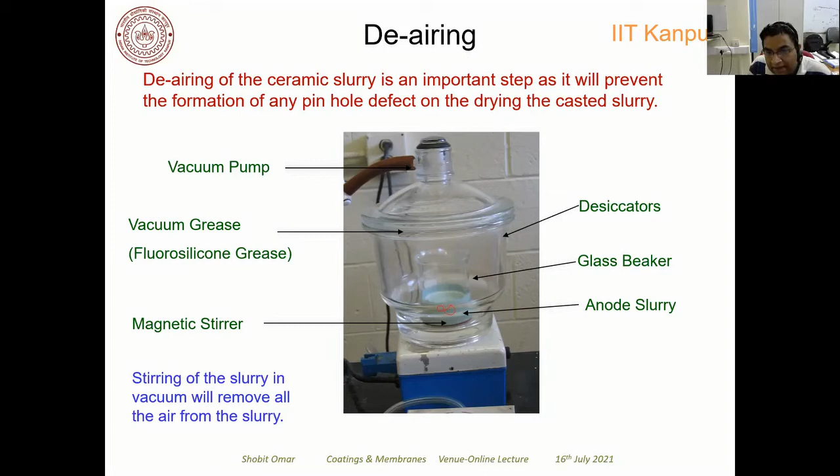What you do is you take a vacuum chamber desiccator, put your slurry in a glass beaker, and magnetically stir the slurry, and after stirring, you increase the vacuum, so you will see the air come out of the slurry. You have to do this for maybe 1 to 2 hours to take out all the air present inside the slurry through this vacuum process.

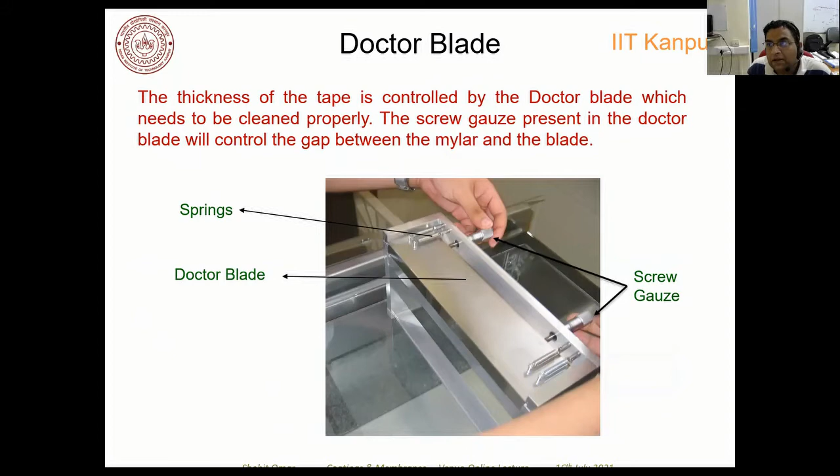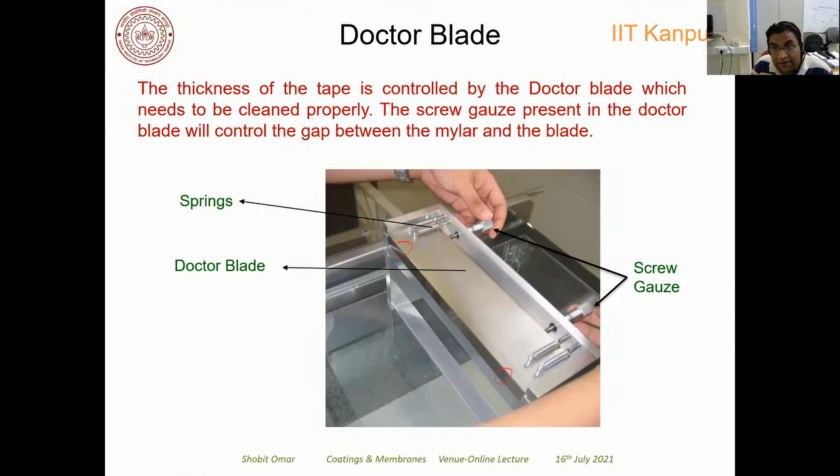Then you have to control the thickness of the tape by adjusting these screw gauges, which will control the gap between the doctor blade and the mylar. Okay, so these are the 2 screw gauges. So I have just put the doctor blade on top of the substrate, right? This is your mylar.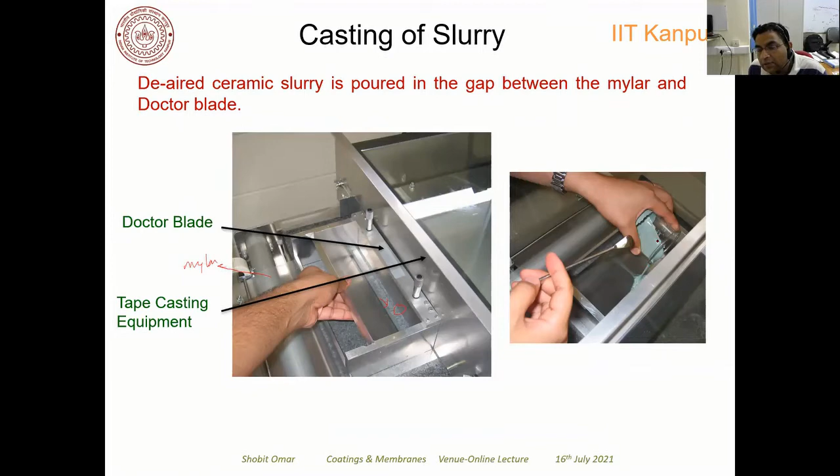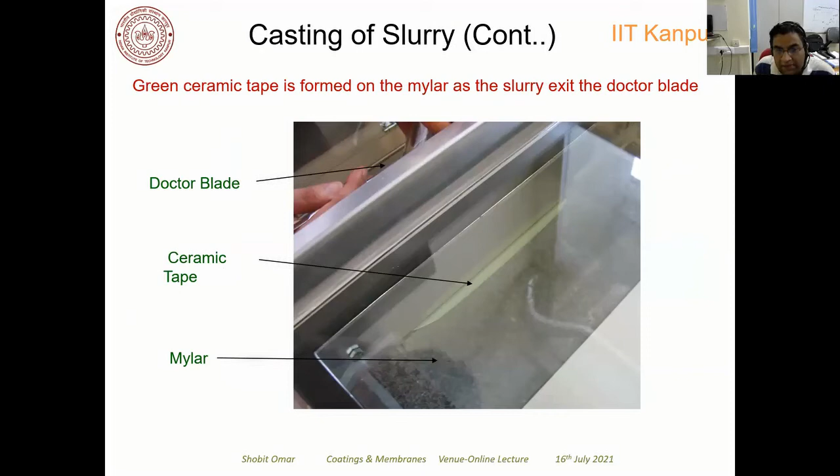Now, once you get the tape, as I said, these tapes can be standalone, or they can also act as a coating, right? So for the coating purpose, you have to laminate these tapes together. There is a process called lamination, where you laminate these different types of tapes together, and you get a multi-layer structure. Okay. So I am now going to talk about three case studies, which will show you the process of coating and membranes.

First is solid oxide fuel cells, which is a solid state electrochemical device that converts chemical energy of the fuel to electrical energy. You can see that this is the microstructure of a solid oxide fuel cell, and it's a multi-layered structure made of different materials. This is your cathode, this is your anode, and of course this is your electrolyte. One can see that the anode and cathode are porous in nature, while the electrolyte is dense.

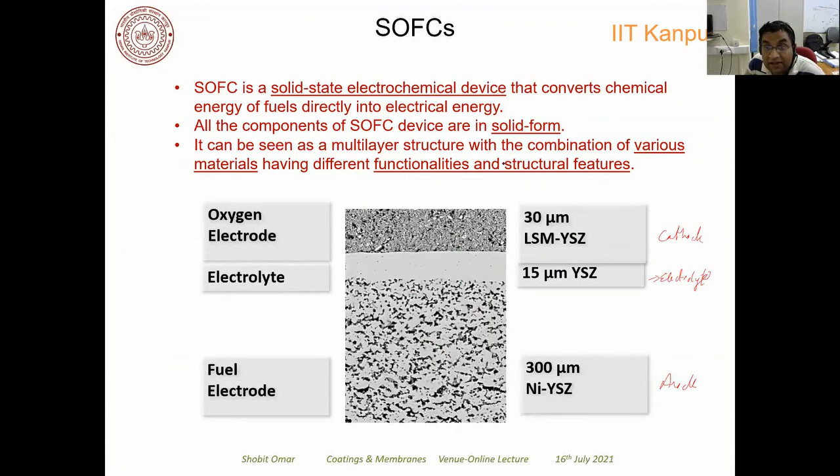Now, if the cathode does not have any porosity, then the oxygen may not reach the interface region. That is the reason we require pores inside the cathode. And this is the same reason why the anode also has pores, so that the fuel can come in contact with the electrolyte and anode interface. In the microstructure, the anode has large pores while the cathode has small pores. The reason is that the anode is forming water molecules, which also have to be taken out.

However, the electrolyte does not have any porosity. It should be highly dense, because if it is not, then hydrogen and oxygen will directly combine in a chemical reaction. But we do not want that. We want this reaction to happen electrochemically, so the oxygen ions flow from cathode to the anode side where the reaction occurs, and this is dictated by the Nernst equation. And you will get a potential from this. The electrons formed go to the external circuit to provide useful power, and then finally go back and combine with oxygen again. So this completes the whole circuit.

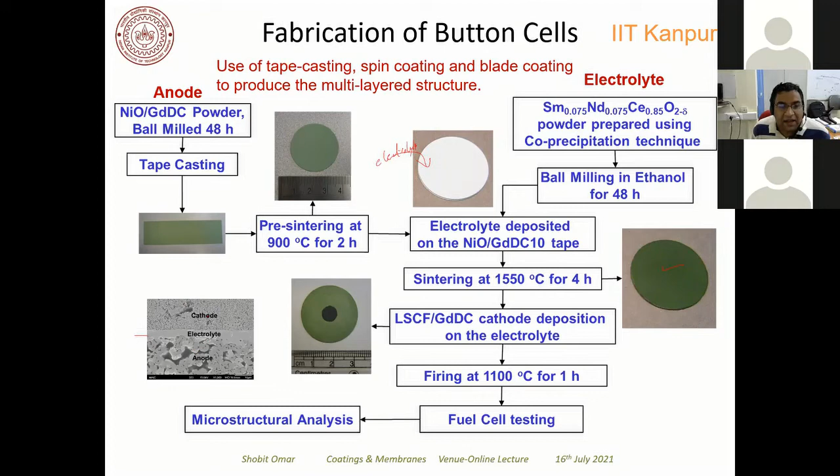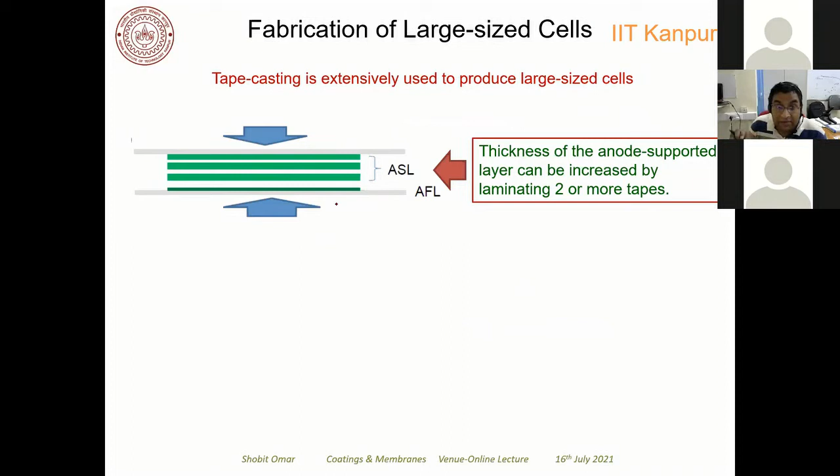And if you make a large scale cell, then you have to basically use a lamination process where you laminate the tapes together, right? And so this is basically the lamination process where you are laminating different tapes together, thick film and thin film.

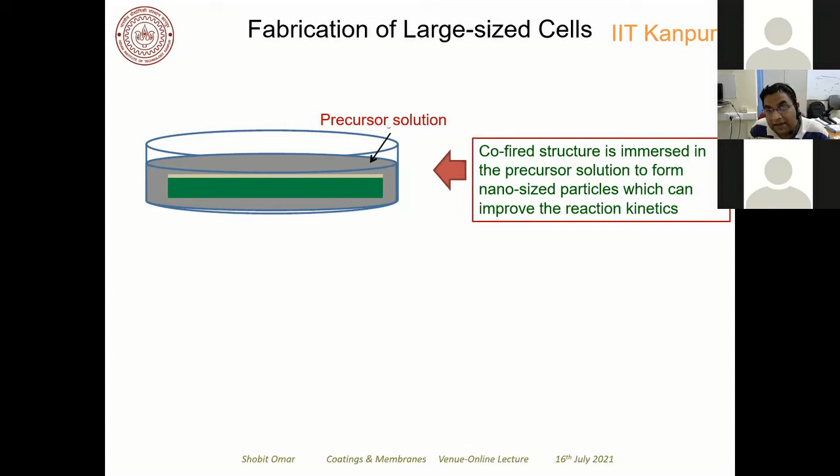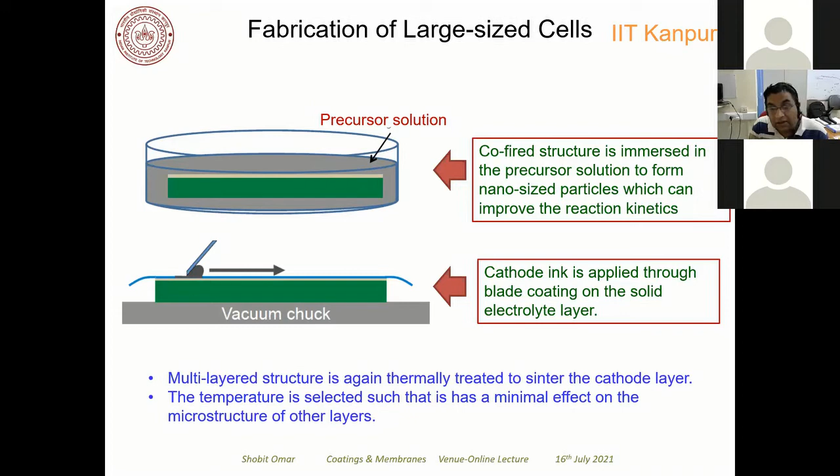And sometimes you also have to infiltrate some precursor solution in the cathode and anode in order to enhance the catalytic activity of the electrochemical reaction occurring at the electrodes. So this is what is done, and then you follow it by the blade coating of the cathode on the electrolyte surface.

I will not talk about the batteries because of the time constraint, but this is very important. So I'm just going to present you the case study of the TBC, which is very important. TBCs are used to insulate the superalloys, which cannot withstand such a high temperature of the fuel. As I said, the fuel will operate at high temperature, and if you increase the fuel temperature, then the efficiency of the device also increases.

So we have to protect these superalloys, and we do that by coating with the bond coat as well as some type of oxides. The bond coat is basically of 100 micron, and it contains chromium, aluminum, yttrium, right? As it's an alloy, it is oxidation resistant, while zirconia provides the thermal barrier. The maximum thermal barrier that you can get is from the top coat of zirconia.

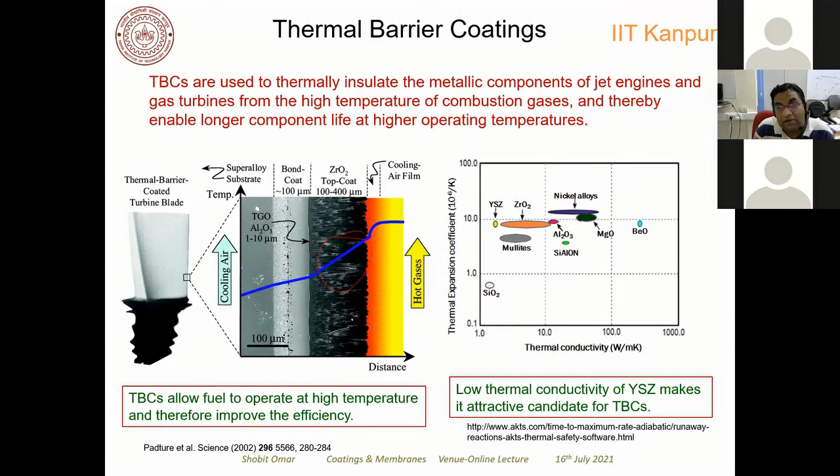And zirconia we use because it has low thermal conductivity, right? Low thermal conductivity, and it has a very close thermal expansion coefficient to superalloys. So that will not spoil the top coat of this TBC when the temperature changes.

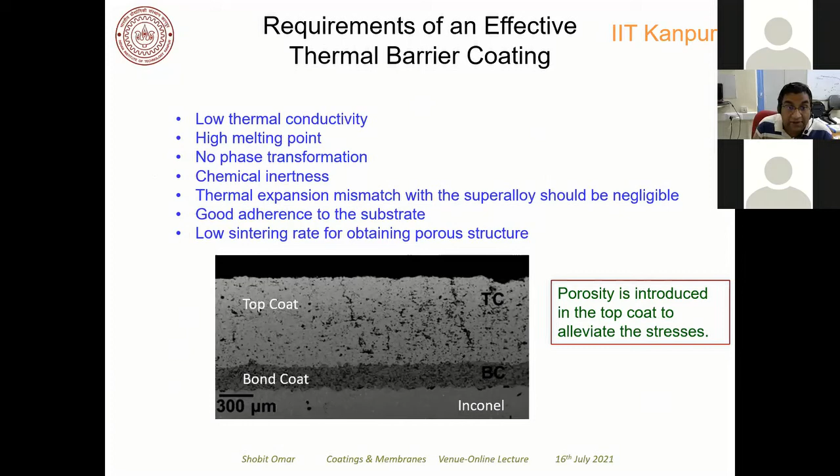So these are a few requirements of a thermal barrier coating: low thermal conductivity, high melting point, no phase transition should occur, chemical inertness, negligible thermal expansion mismatch, it should adhere very well to the substrate, and a low sintering rate for obtaining a porous structure. So to summarize, this is the last slide.

Here I have shown you the microstructure of two top coats that are prepared by the air plasma spraying technique and by the electron beam physical vapor deposition technique. You can see in the microstructure prepared by air plasma spraying that the splats formed have cracks or porosity along the interface of the bond coat and this top coat, right?

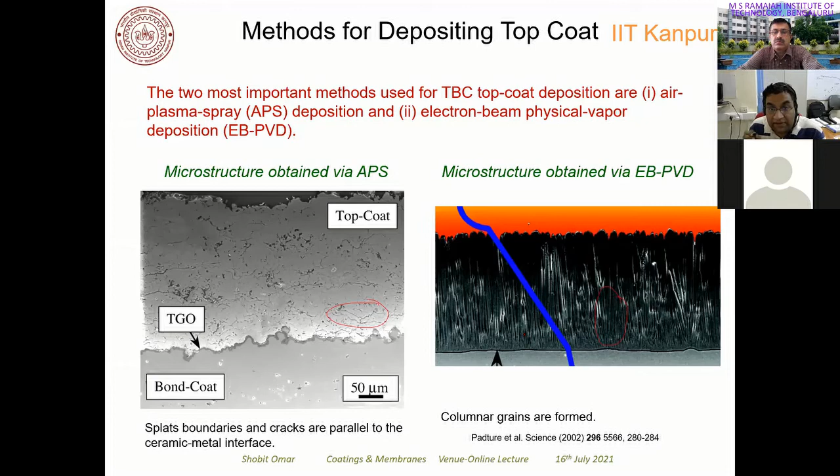However, the microstructure that you obtain from EBPVD is columnar in nature. So these are two important features which you will observe in the microstructure. Now, when the splat boundaries and cracks are parallel to the ceramic metal interface, they reduce the thermal conductivity, and that is very good. That will protect the component material.

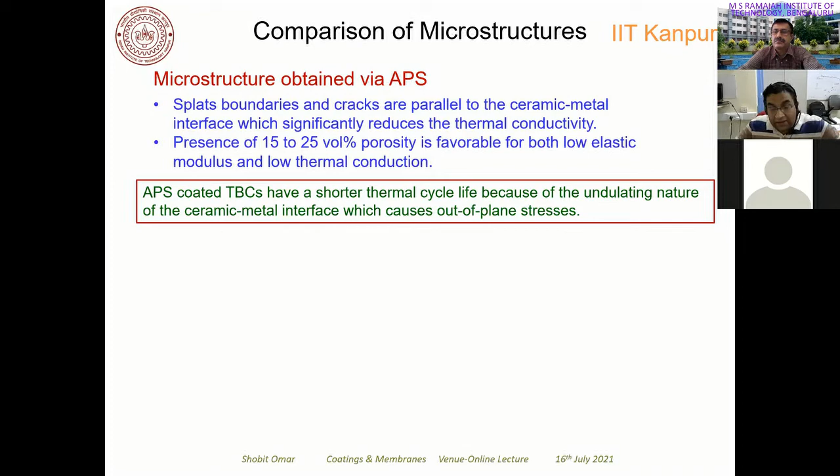However, they do not have a very long thermal cycle life, because the surface of this bond coat is not uniform, and that will create a lot of out of plane stresses. So it has a very short thermal cycle life if the splats are parallel to this interface of the metal and ceramic. On the other hand, you have a columnar grain, right?

You have columnar grains, and inside these columnar grains you have porosity. And of course, these columnar grains will also have some porosity in between that will basically absorb all the stresses present because of the undulating nature of this ceramic metal interface. Of course, the thermal conductivity will be higher in this EBPVD microstructure compared to APS, because there will not be any interface that will stop the thermal conduction.

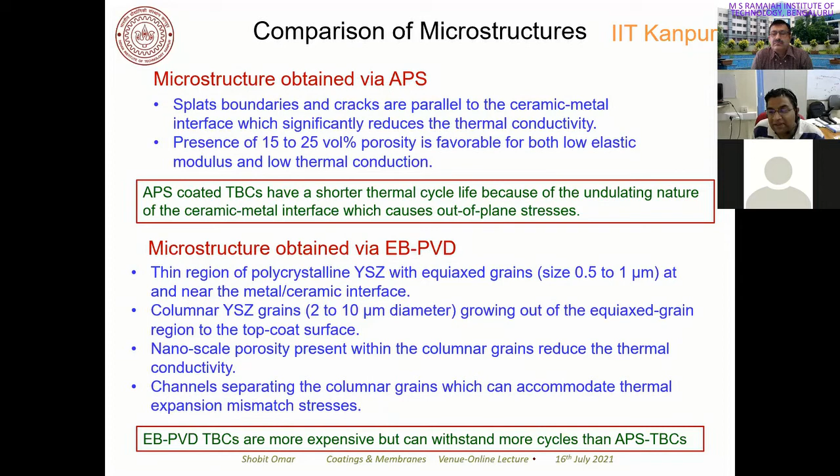All the layers are not at 90 degrees. They are out of plane compared to what you will have with the APS microstructure. But EBPVD TBCs are more expensive but can withstand more cycles than APS TBCs. So this is about the coatings and membranes.

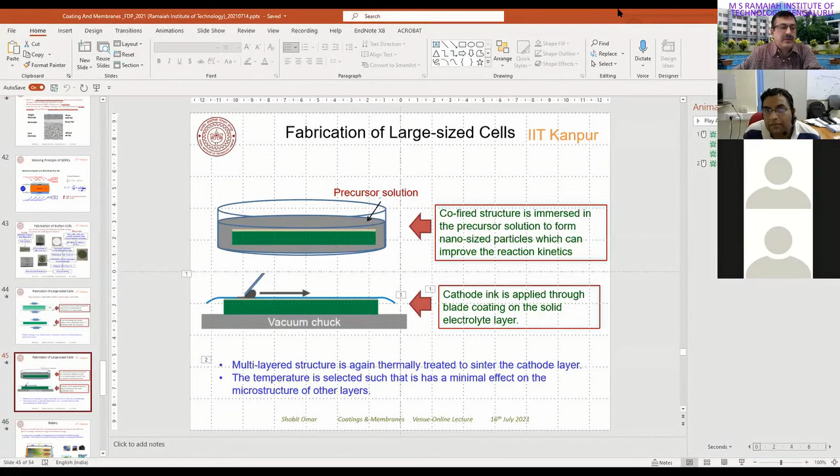Hello, sir. You have some more questions in the chat box also. Is it audible, sir?

Okay, so what type of coating is best suited? Which material is suited for increasing the porosity in case of supercapacitor application? So normally, I'm not aware of supercapacitors, but for batteries or in fuel cells, if we want to increase the porosity, we normally use some type of polymer, PMMA, right? Which can be used to make a porous electrode structure in a 3-dimensional electrode architecture. That is what we use.

You can also use starch as a pore former. What you normally do is you make a slurry of the electrode that will contain your active material as well as other additives, as well as your pore former, right? Then you make a uniform homogeneous slurry, and you coat it on the substrate, and then you sinter it in air.

If you don't do it in air, then this pore former, that is starch or PMMA, will not go out. So you have to do it in air, and once you do that, whatever is left is basically the pores inside the electrode structure. So you can do such type of processing.